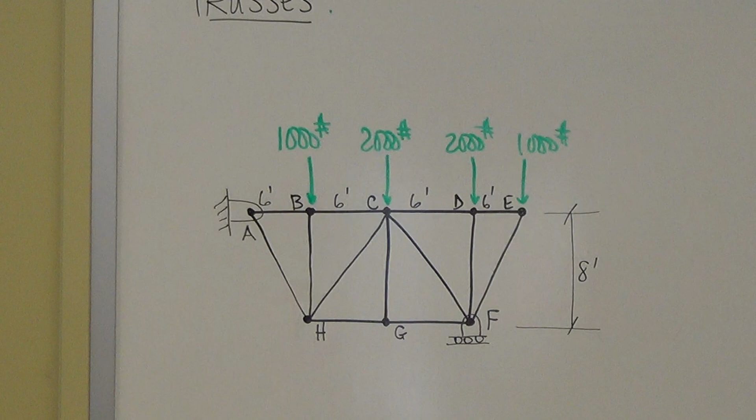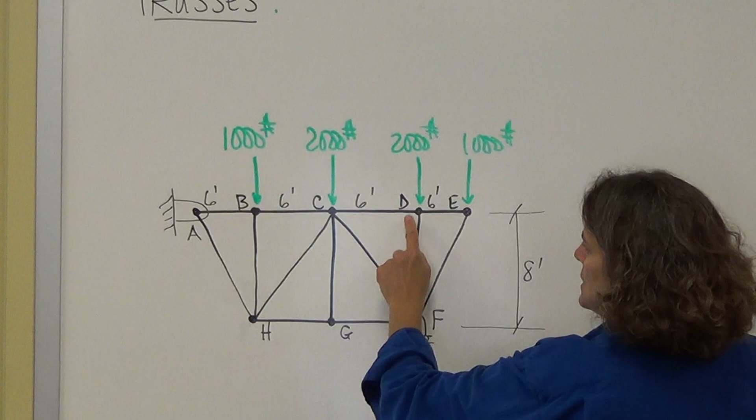So now we're looking at another truss. We see four external loads on it, all going down on joints B, C, D, and E. And then we see the main connections: there's a main connection at A, which is a pin, and the main connection at F is a roller.

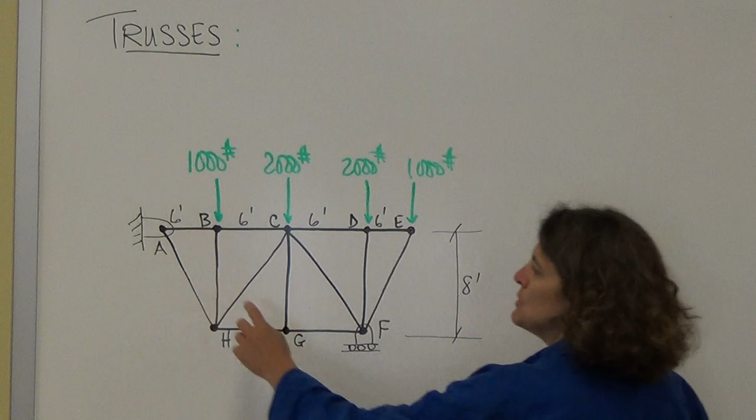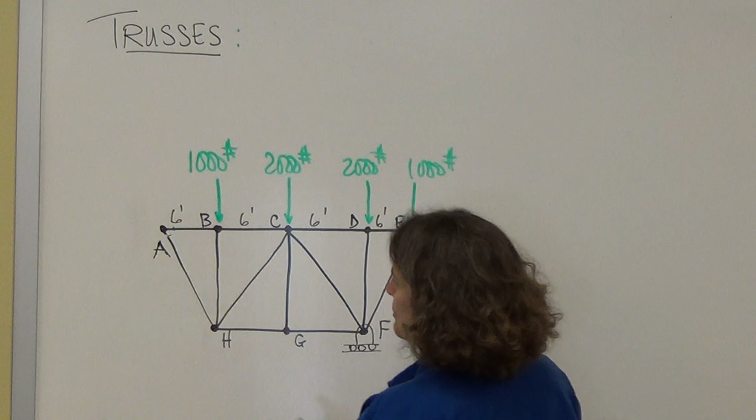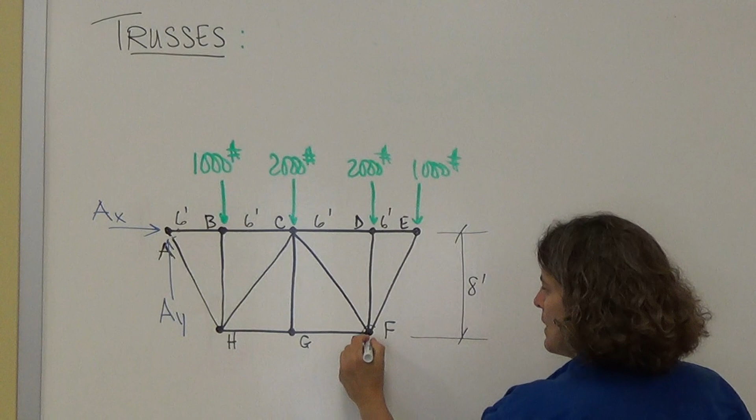What's the first thing we do with trusses? The first step is we always remove the structure from its main supports. I'm removing it from its main supports at A, and we saw that it was a pin, so for a pin I have to put a force in the Y and a force in the X. Then at F we have a roller, so at F I have a normal force.

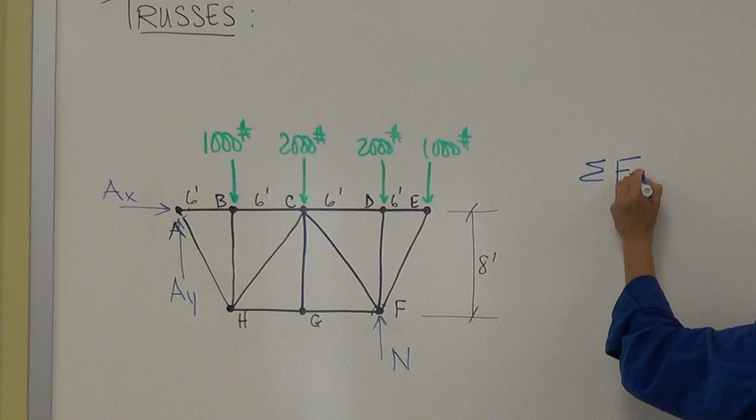In the first step, you take the structure, remove it from its main supports, and find what those values are. So we have three unknowns, we need three equations, we have one body, one structure. Which equation do we want to do first? How about sum of the forces in the X? The only force in the X is AX, so AX is equal to 0. I don't want to do sum of forces in Y because there are two unknowns, so I'll do sum of moments about A.

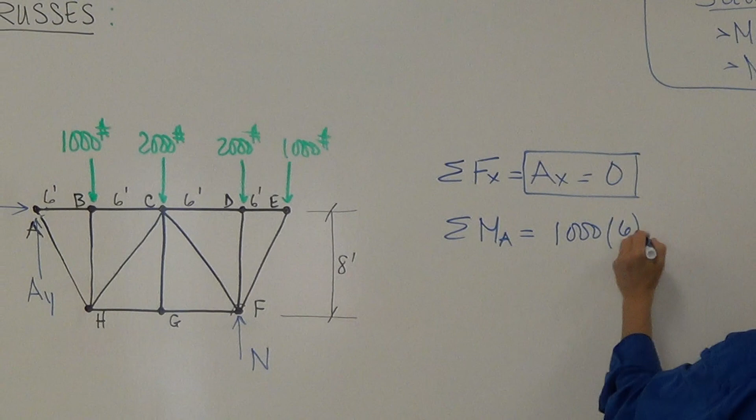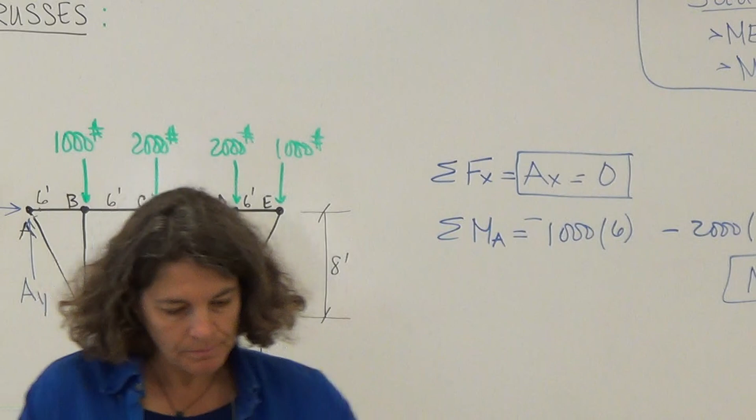Let's see. I have 5,000. Yep.

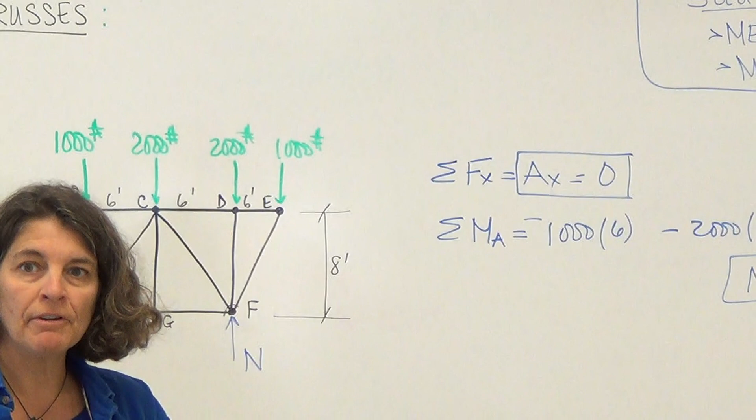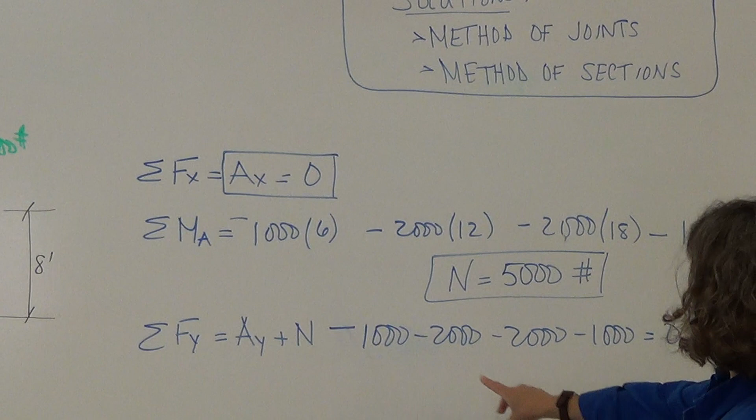Then we do sum of the forces in the Y, which is AY plus N equals 0. So AY plus N minus 1,000 minus 2,000 minus 2,000 minus 1,000 equals 0. So if N equals 5,000, AY must be... is it 1,000? Yes, 1,000 pounds.

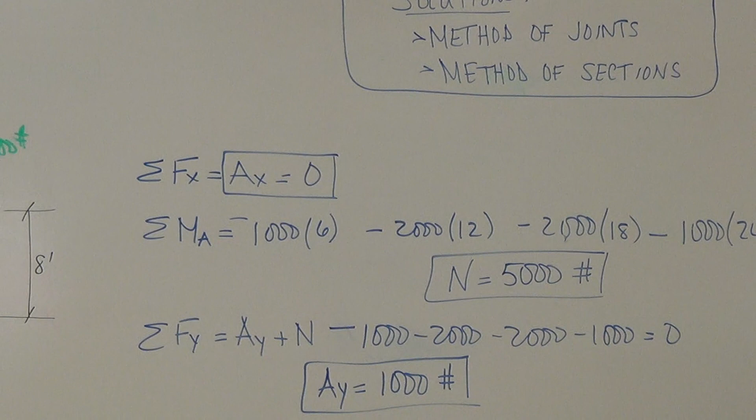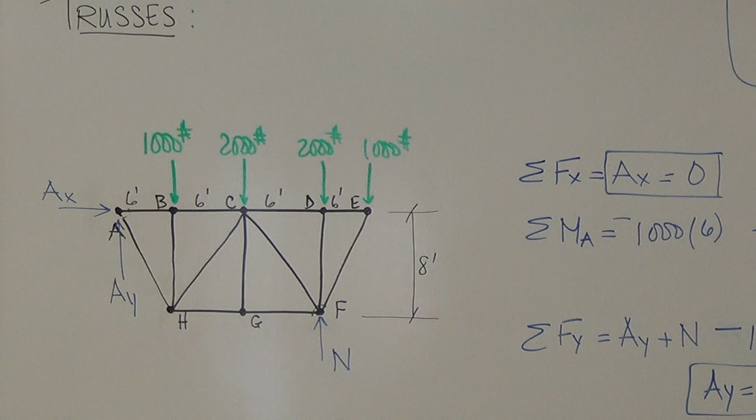Okay, could I do a check? If I ever have extra time, I should always do a check — sum of the moments about some other point to make sure your values check out. That's what's really great about statics: you have the opportunity to do checks before you move on. So now we know N is equal to 5,000 pounds, AX is equal to 0, and AY is equal to 1,000 pounds.

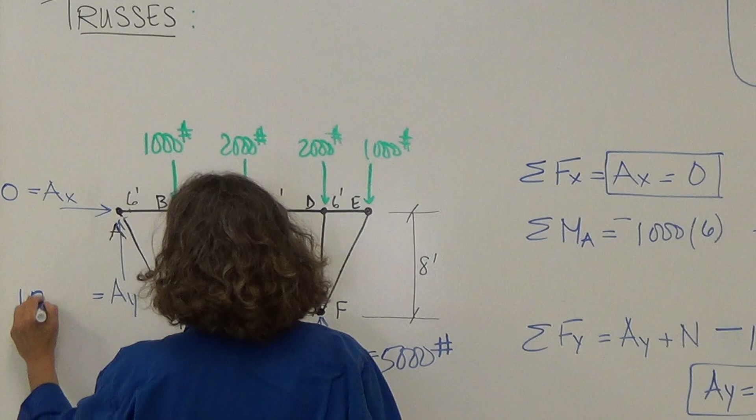So I'm going to erase my calculations here.

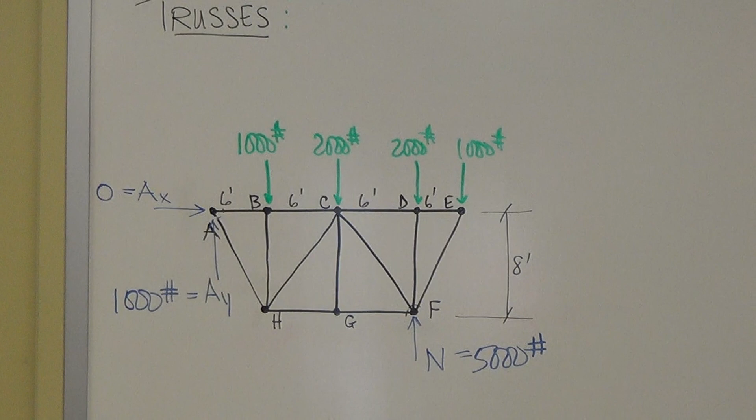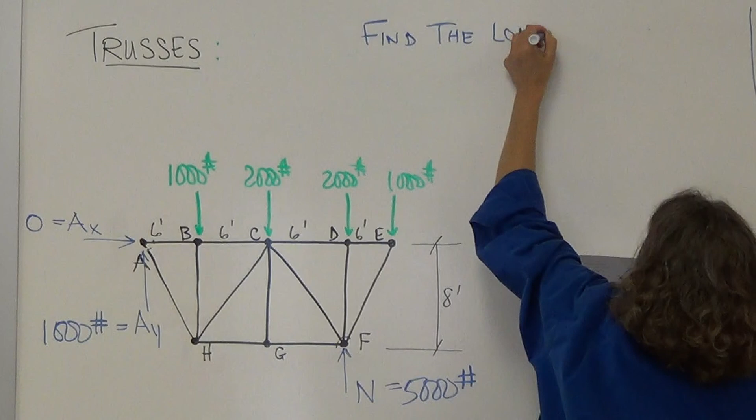So I didn't tell you what the question was for this problem. What they want is to find the loads in members CD, CF, FG, and CG.

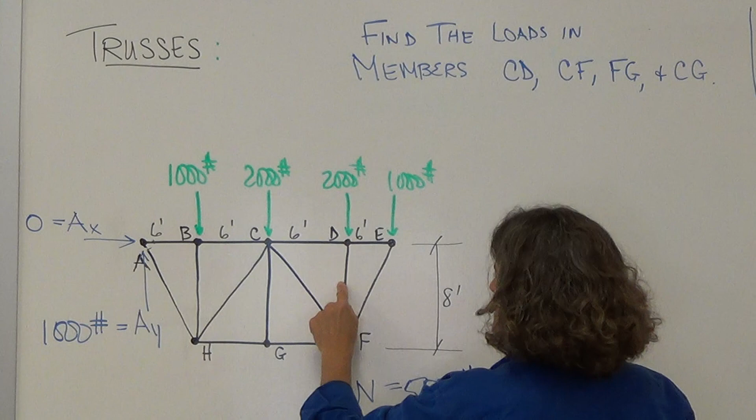Now, how do we know that this is a truss again? It's because it's all two-force members. How many members are here total? 1, 2, 3, 4, 5, 6, 7, 8, 9, 10, 11, 12, 13 — so 13 members total.

If we did method of joints, we would have to find all the members — we'd have to look at all the different joints to find them. Now, to back up to something we did last class: there are two rules on determining which forces are zero force members. Do you remember what those two rules were?

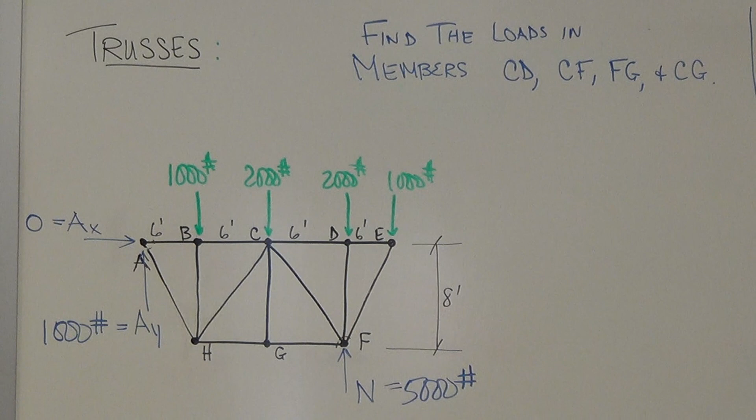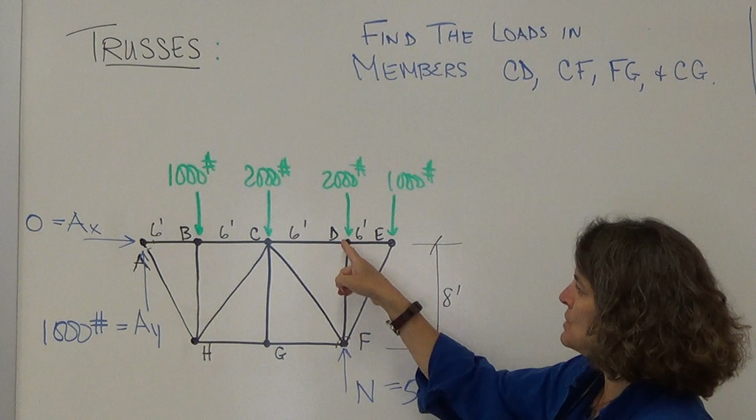One: if you have a joint where two members come in collinear to each other, and one is non-collinear, and there are no external supports or loads at that point, then the member that's not collinear is a zero force member, which means it holds no load. Can you see a joint here that follows that rule? A joint where three members come in, two of them collinear, one not collinear, and at that joint there's no external support or load. Doesn't G fit that description? This is a joint where two members come in collinear, one's not collinear, there's no external support or load here, so this guy is a zero force member.

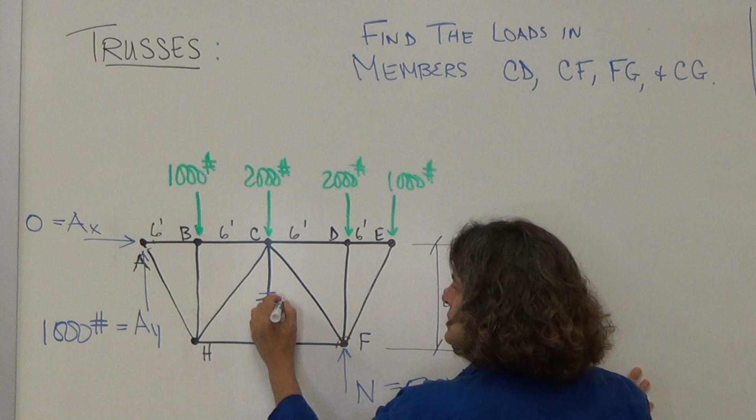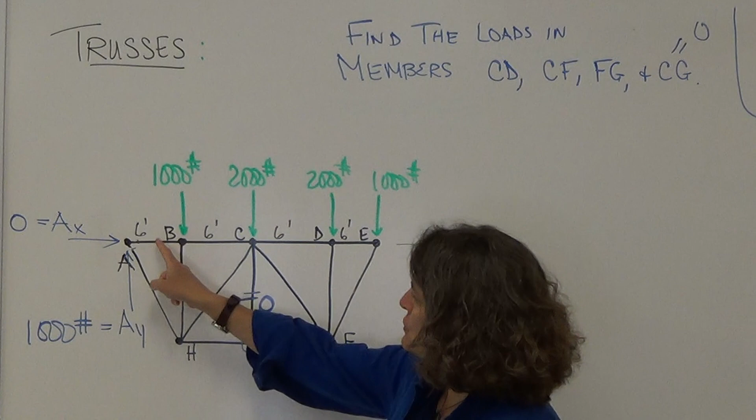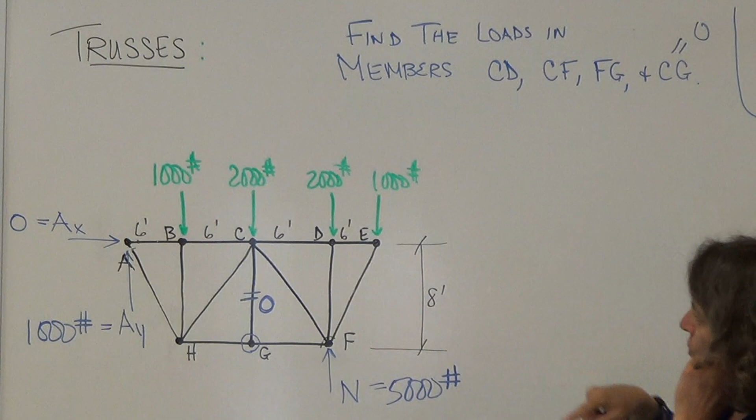So we already know that CG is equal to 0. The other rule on zero force members is where two members come in and there's no external support or load — that doesn't pertain to A, and the only other possible one that could pertain to it is E, but E has an external load too. So it's only CG that's equal to 0.

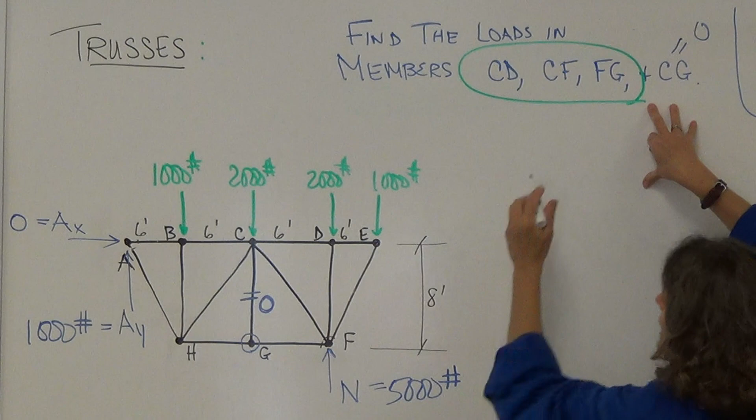So now what we're stuck with in terms of the problem is finding out these guys. Let's figure out where they are. CD is right here — oh, let me use a different color.

CD is right here, CF is right here, and FG is right here. So if we want, we can do method of joints. If you wanted to do method of joints, would you start from the left or would you start from the right in terms of where these members are?

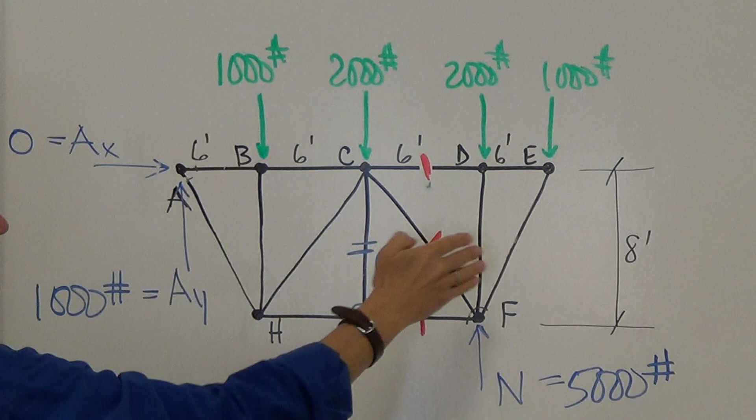I would start from the right because it's less work, right? If you do C, you have to find these two. Then you move to B, you find these two. Then you move to H, you find these two. And you've got to keep going on. I'd much rather do less work.

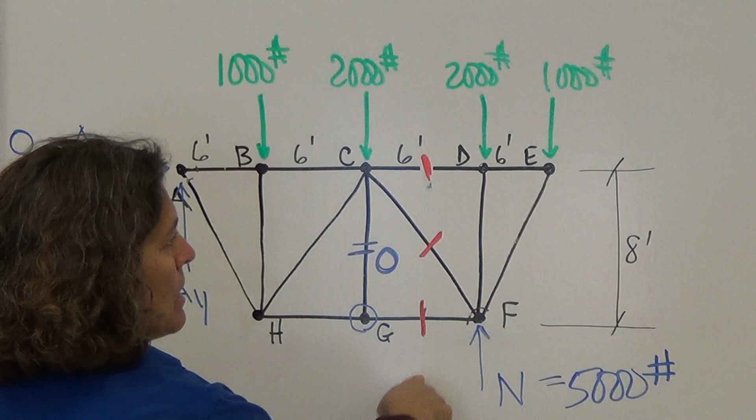So at E, I find these two. Then I go to D, find these two. Go to F, find these two, and then I found them. But that's 1, 2, 3 joints that I have to analyze. And I'd rather not do all that. I'd rather do something different.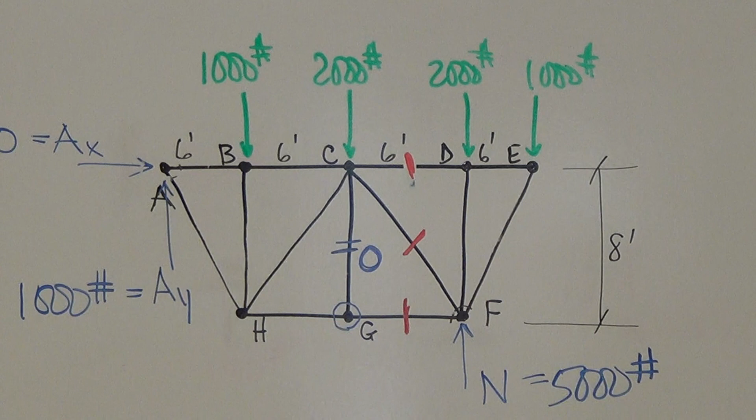Remember the idea that whenever we break something, the internal force becomes an external force. If the member stays intact, then that force is internal and we can't analyze it. So if I want to find out what CD is, what CF is, and what FG is, why not just break the truss right in half here?

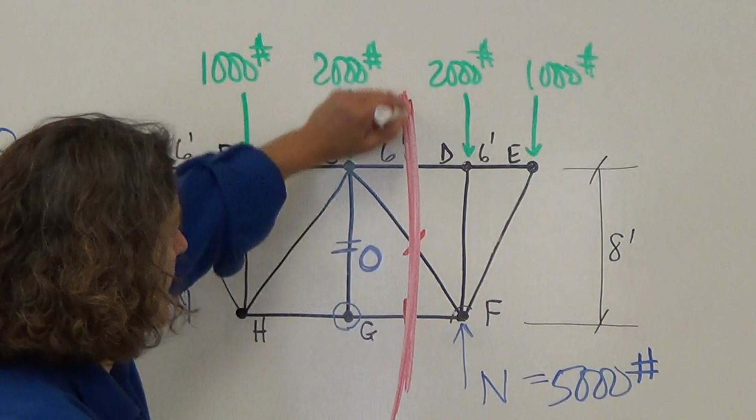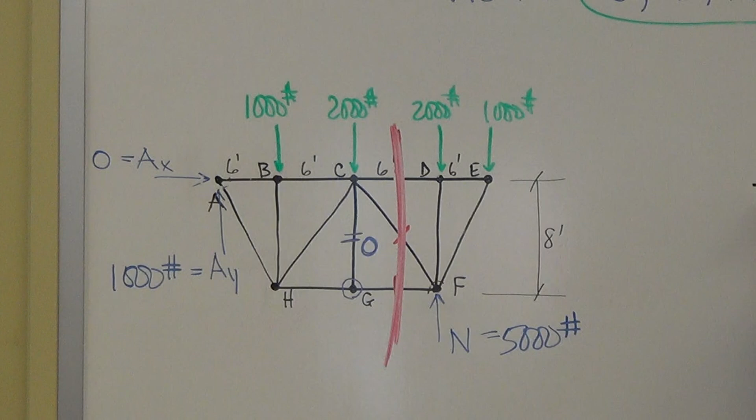I have a left side truss and I have a right side truss. And if I analyze the right side now, let's see how you would draw it. Here's D, here's E, here's F, here's DF, and this goes to point C, this goes to point G, and this goes to point C.

So what forces do I have here now? I have my normal, which was 5,000 pounds. I have my 1,000 pound, and I have my 2,000 pound, and then I have my CD, I have my CF, and I have my FG.

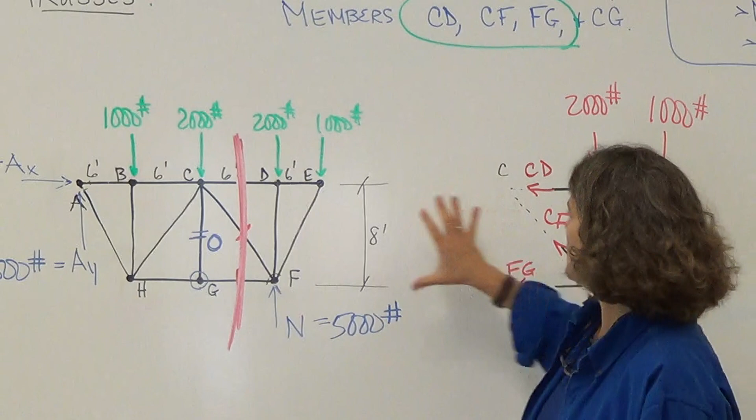Does that make sense? Rather than analyzing joint E, then joint D, then joint F in 3 different steps, I'd rather just break the structure in half at the points where I'm trying to find the members and just analyze the whole right section. Why am I choosing the right section, not the left?

It doesn't matter. I could do either one because it's in static equilibrium, right? So the whole right section is going to be equal and opposite to the loading on the left section, no matter where I broke it. But on the left section, I might have more stuff to do. So I just picked the right side.

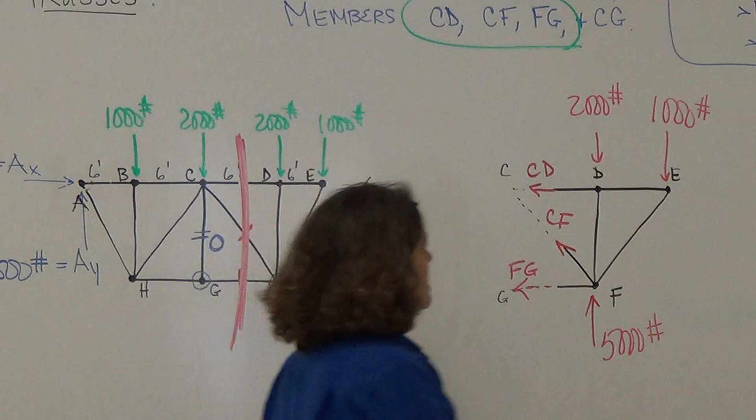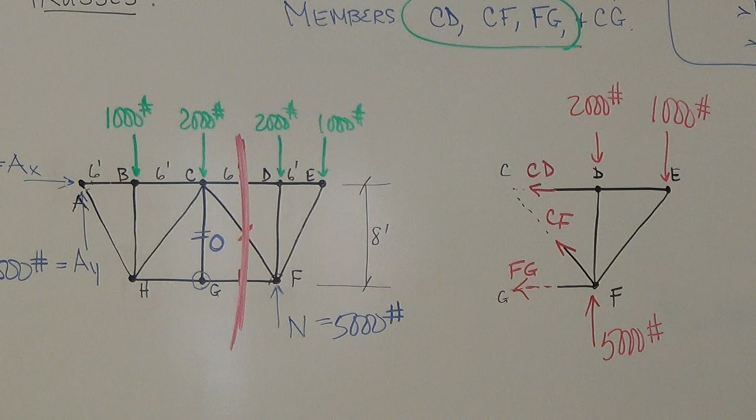So now we're looking at a piece of the truss, and we have our 1,000, 2,000 external. We have our load at F, and then we have these 3 unknowns. If we have 3 unknowns, how many equations do I need? 3 unknowns, I need 3 equations, and we have to decide what kind of equations to do.

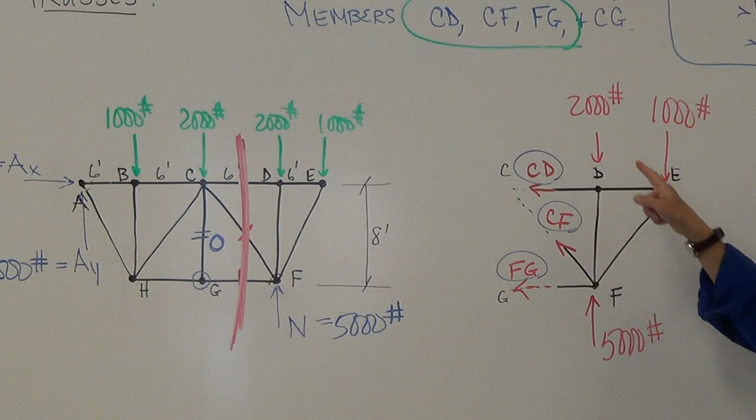Do you want to do sum of the forces in the X? No, because there would be 3 unknowns. How about sum of the forces in the Y? I think that would be a pretty good one.

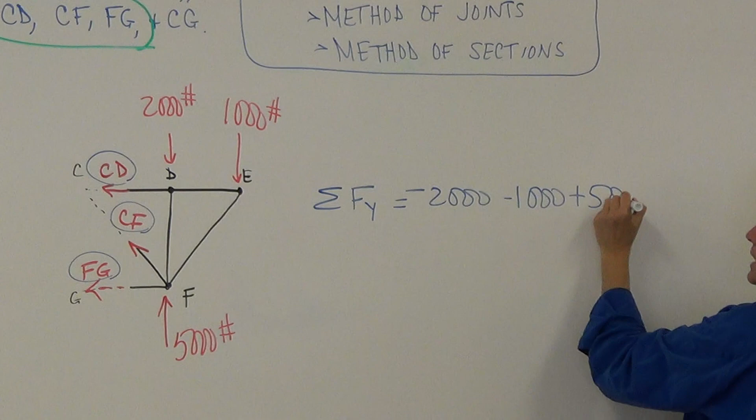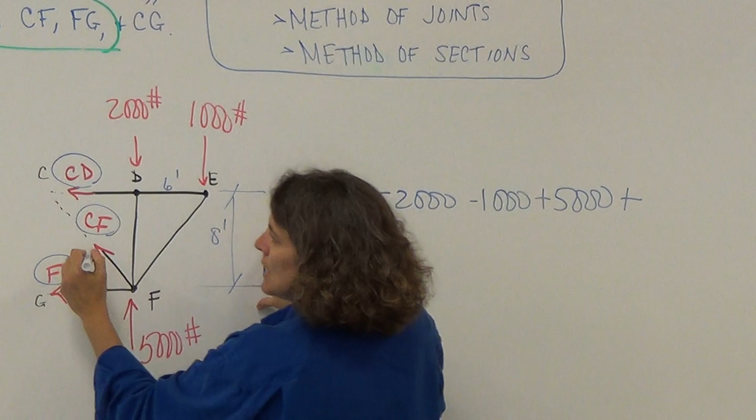Do sum of the forces in the y equals negative 2,000 minus 1,000 plus 5,000 plus... oh, we gotta put the distances, don't we? This is 6 feet. This right here is 8 feet. And this dimension right here, if it's 6 in the x and 8 in the y, isn't it a 3, 4, 5 triangle?

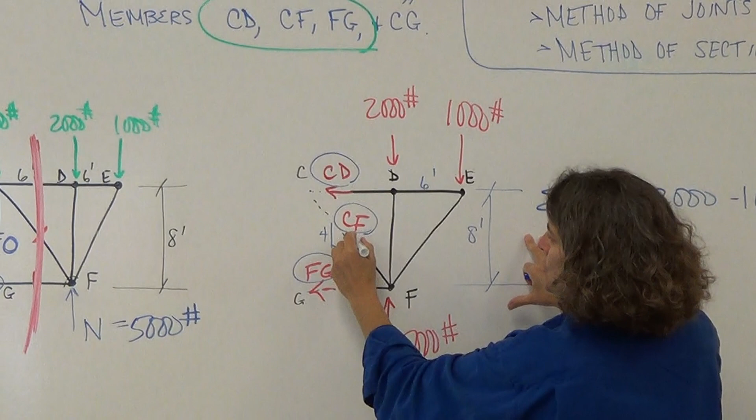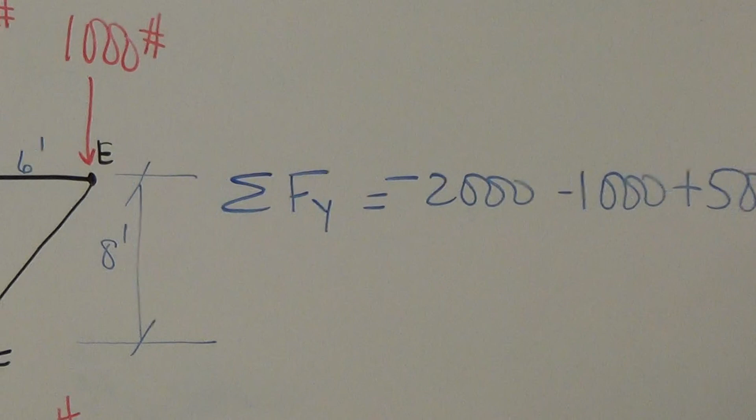So going back to sum of the forces, 2,000 is down, 1,000 is down, 5,000 is up, and then 4/5 of CF is equal to 0, and CF turns out to be... what does it turn out to be? 2,500, I think. Okay, let's see.

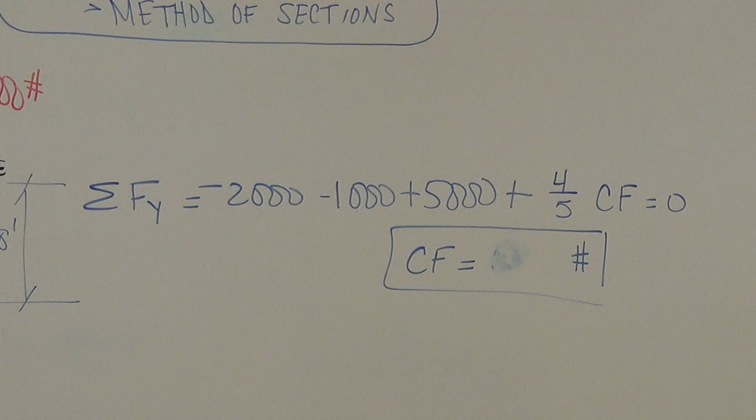What'd you get? 2,500? 2,500. Okay. And I got a negative. Negative, yeah. Negative 2,500. Before we move on, let's go back and say, a negative, what does that tell us? It's compression.